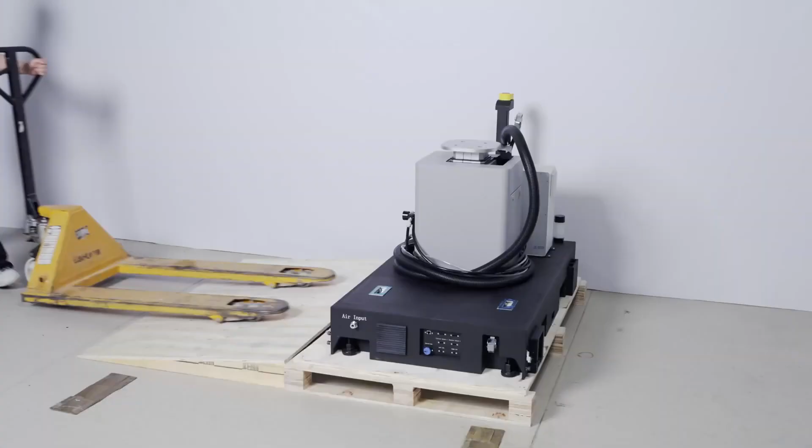DOBOT Palletizing solution. This video will introduce the installation tutorial for the palletizing solution. Open the wooden crate packaging. Use a forklift to position the workstation in the installation area. Note the distance between the front wheels of the forklift.

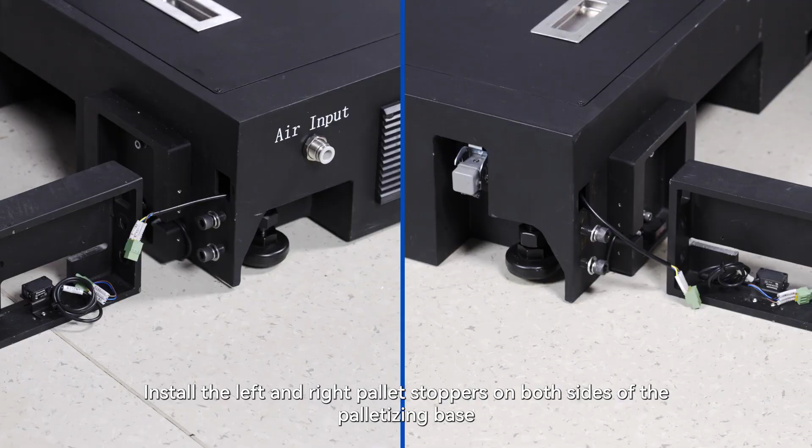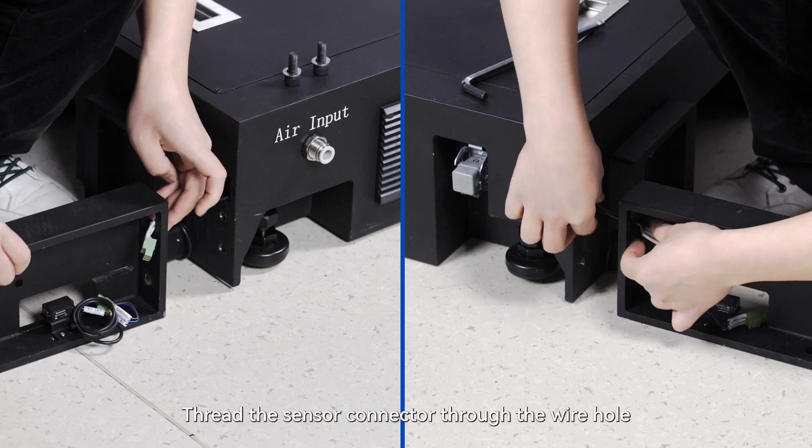Organize the items inside the package. Check all items. Install the left and right pallet stoppers on both sides of the palletizing base. Pay attention to the orientation of the grooves during installation. Thread the sensor connector through the wire hole. Tighten the screws of the pallet stoppers.

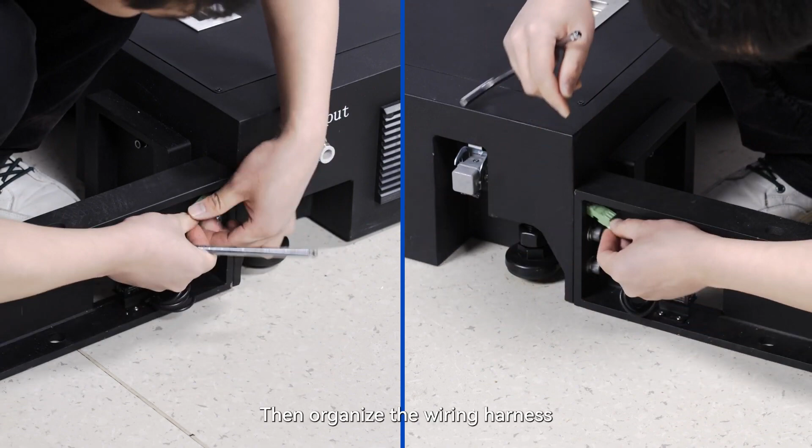Plug in the sensor connector. Then organize the wiring harness. Use a wrench to adjust the base cup of the workstation at the four corners. Level the workstation.

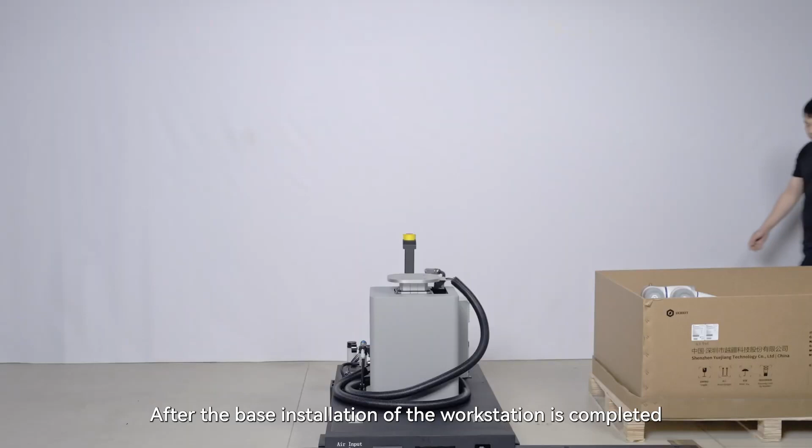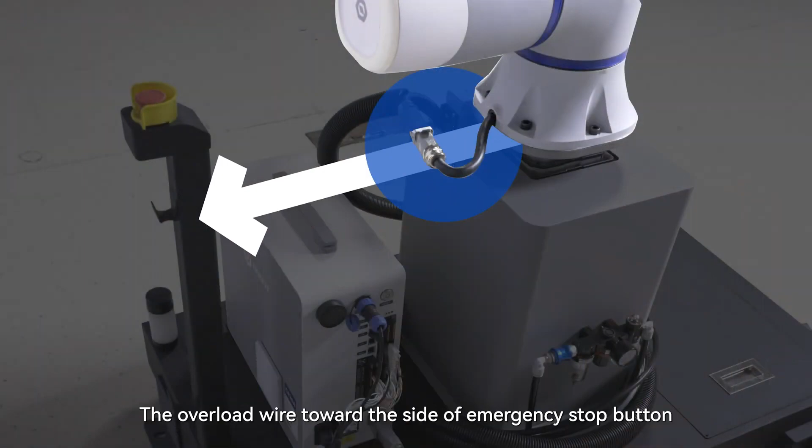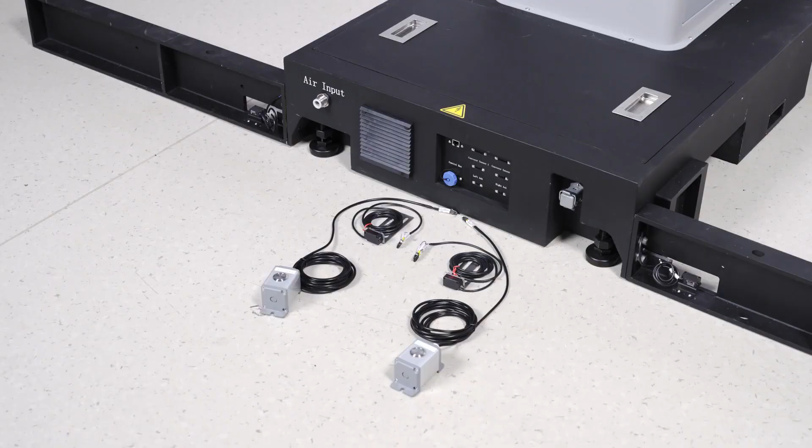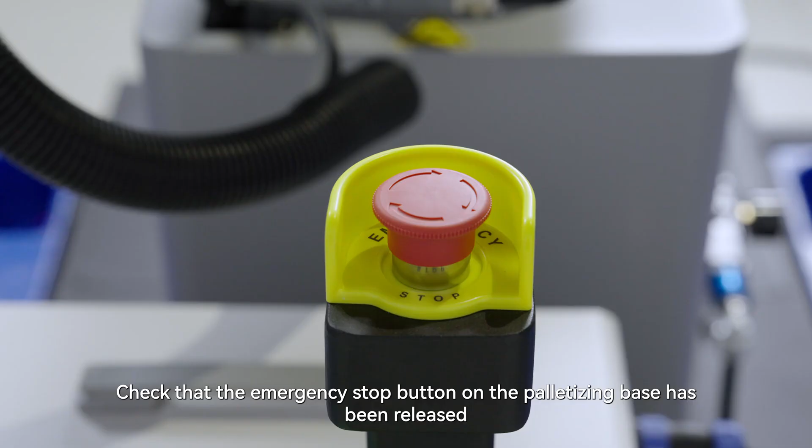Connect the pallet confirmation button box to the left and right ACK interfaces on the base respectively. Connect the conveyor photoelectric sensor. Check that the emergency stop button on the palletizing base has been released. Connect the power cord of the workstation.

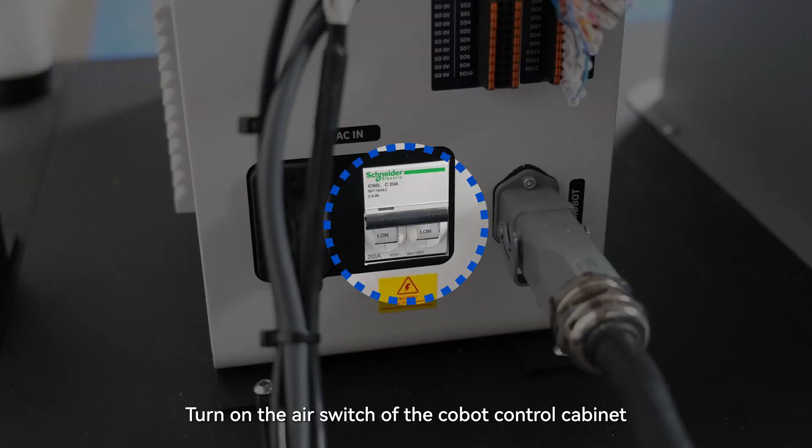Turn on the workstation leakage protection. Turn on the air switch of the Cobot control cabinet. Then press the power button. Wait for the indicator light to stay on steadily to complete the startup.

Visit the Dobot official website using a tablet or computer. Download the DOBOT Studio Pro software. After downloading, proceed with the installation. After the software is installed, connect the Cobot to your device via Wi-Fi or Ethernet cable.

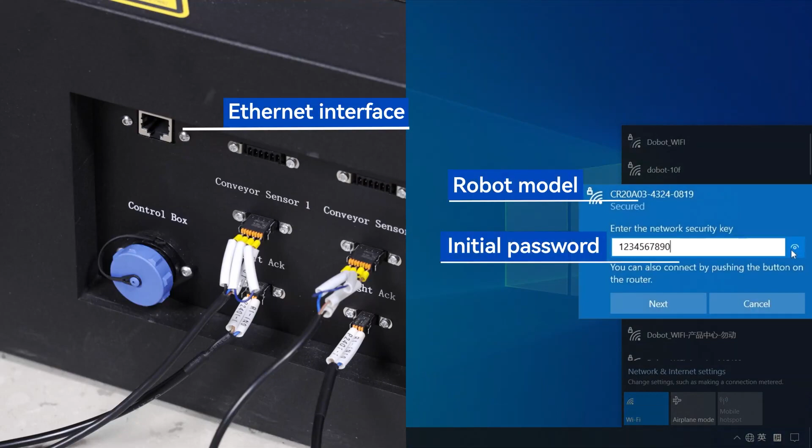Open DOBOT Studio Pro, select the Cobot you want to connect to. Check the software and controller versions. They should be maintained at 4.5.1.0 PAL or above. Set the enable button to on. Click the jog button in the top right corner to open the menu.

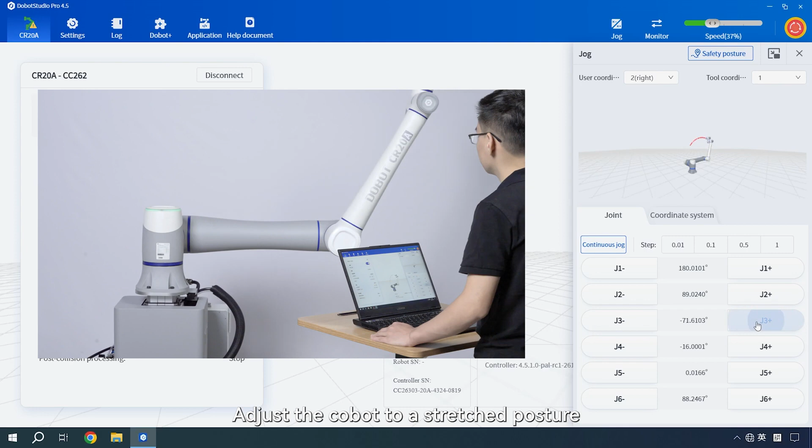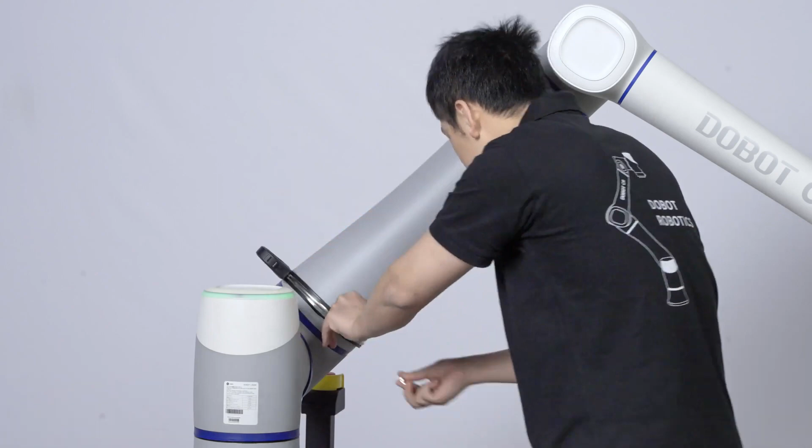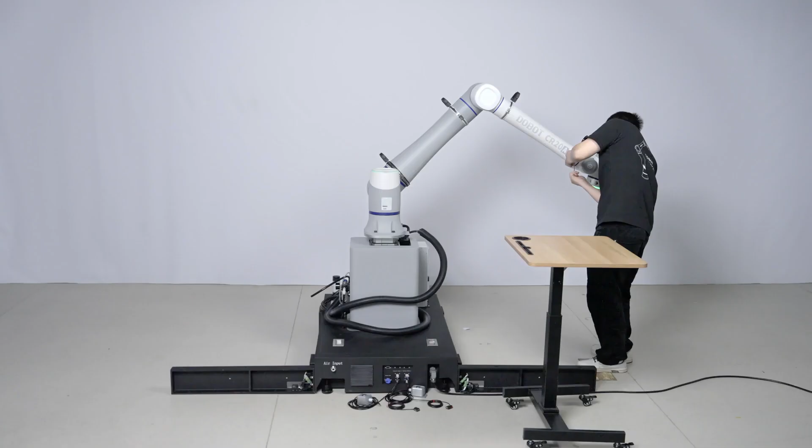Adjust the Cobot to a stretch posture to facilitate the subsequent installation of the cable harness and suction cup of the end effector. Install the 4 cable harness clamps onto the Cobot. Organize the cables and fasten them through the bracket.

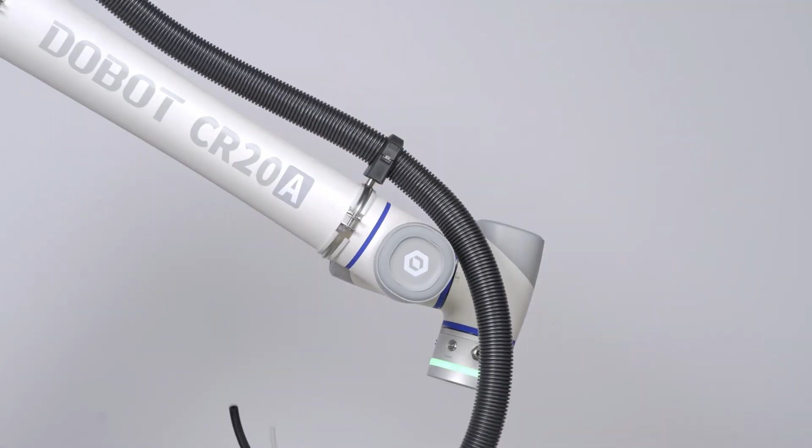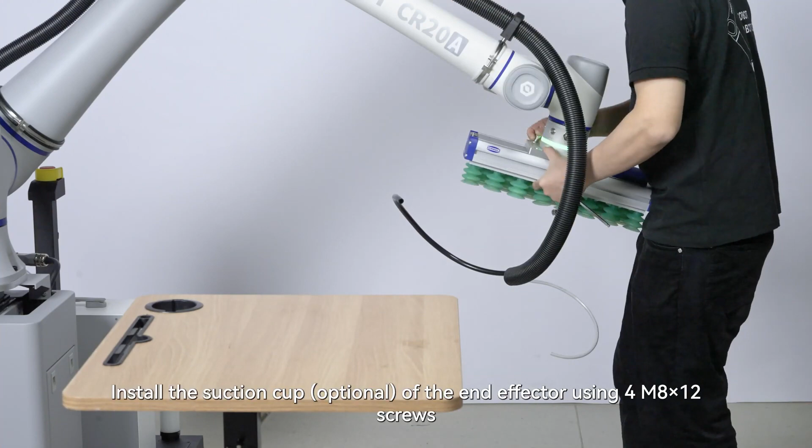Fix the flange to the end effector of the Cobot with 6 M12 screws. Install the suction cup of the end effector using 4 M8×12 screws. Adjust the lengths of the cables according to actual usage. Insert the 12 mm air intake tube and the 8 mm vacuum breaking tube.

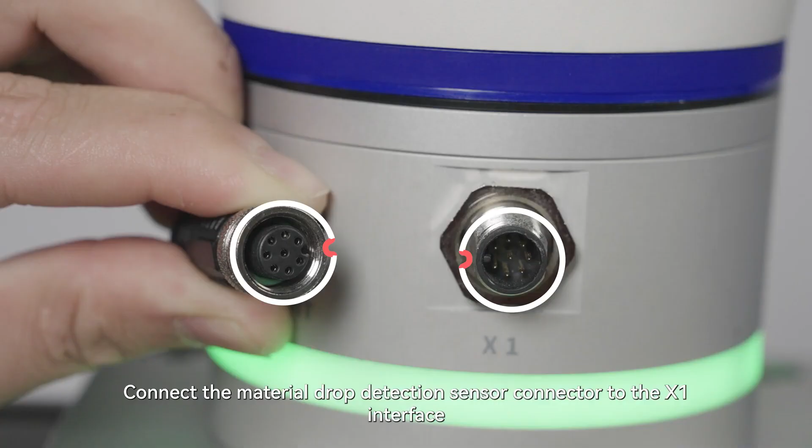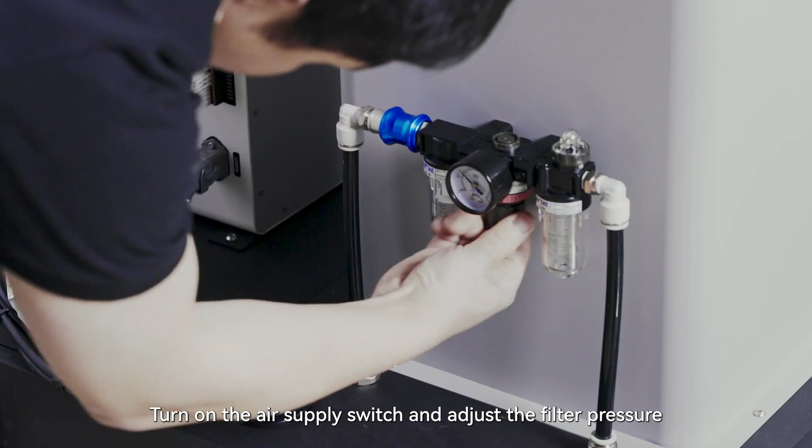Connect the material drop detection sensor connector to the X1 interface. Use a 12 mm tube to connect the air source to the workstation air inlet. Turn on the air supply switch and adjust the filter pressure. Recommended pressure is 0.6 to 0.7 MPa. After the palletizing hardware is installed and turned on, we can start working on the software.

Open DOBOT Studio Pro. Click Dobot+. Import the palletizing plugin provided by the distributor. Click on Plugin Installation to enter the authorization pop-up window. After copying the device serial number, visit the designated website for authorization. Enter the device serial number and the activation serial number provided by the distributor on the web page.

Click to obtain the registration code. Copy the registration code or save it as a file. Then reopen DOBOT Studio Pro. Paste the registration code or import the file in the plugin authorization window. Click Authorize. Wait for a moment. Authorization and plugin installation will be done automatically. After completing the authorization, you can start using the palletizing function to generate the running program.

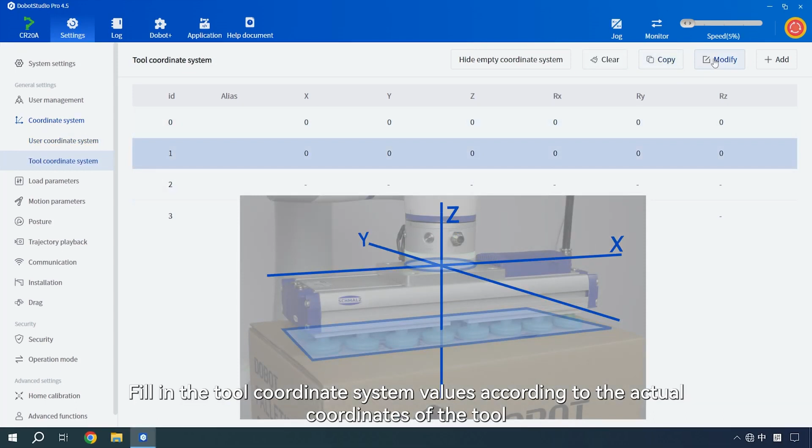Check whether the coordinate system used by the pallet has been built in the Settings Coordinate System Management menu. Click on Tool Coordinate System. Fill in the tool coordinate system values according to the actual coordinates of the tool. Click Save to complete the tool coordinate system setup. Click Monitor in the upper right corner of the interface. Check whether the default IO matches the actual setup.

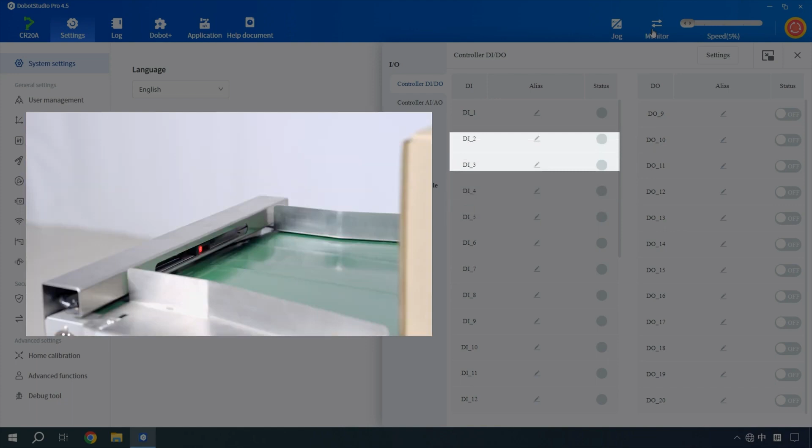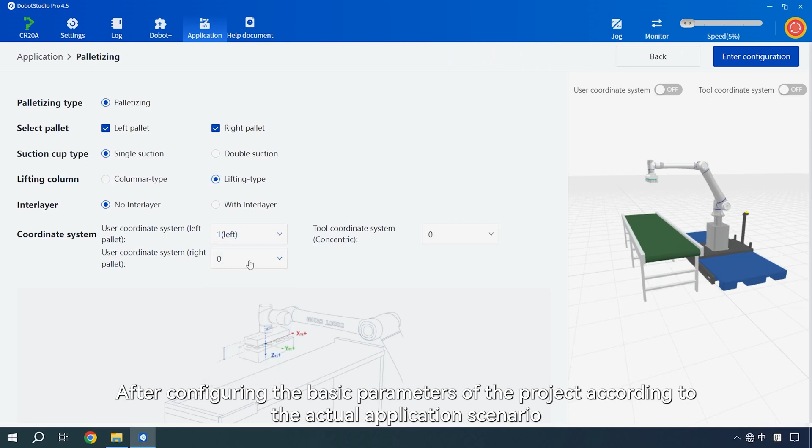Next, create a new palletizing project. Go to the Application menu, click Palletizing. Click New Project in the upper right corner to create it directly, or click to create a new project in More Projects. After configuring the basic parameters of the project according to the actual application scenario, click to enter the configuration. Configure the suction cup I/O signal.

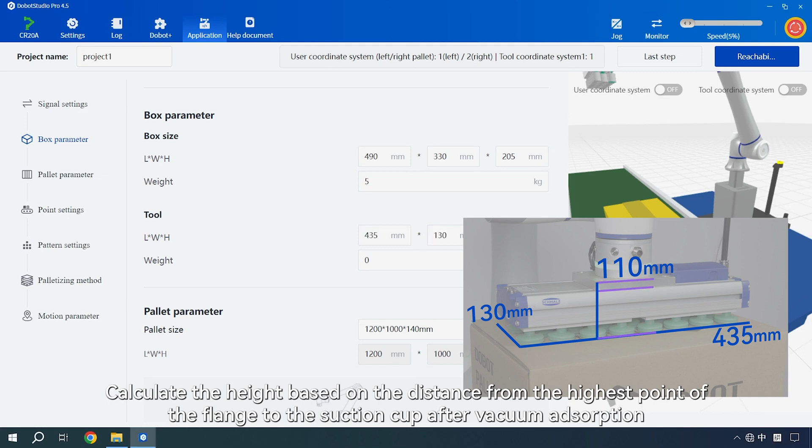Configure the signal for the conveyor belt to feed material. Configure the signal for confirming the new pallet's position. Next, set the length, width, height and weight parameters of the containers. Set the length, width, height and weight parameters of the end effector. Calculate the height based on the distance from the highest point of the flange to the suction cup after vacuum adsorption. Calculate the total weight of the flange and the suction cup.

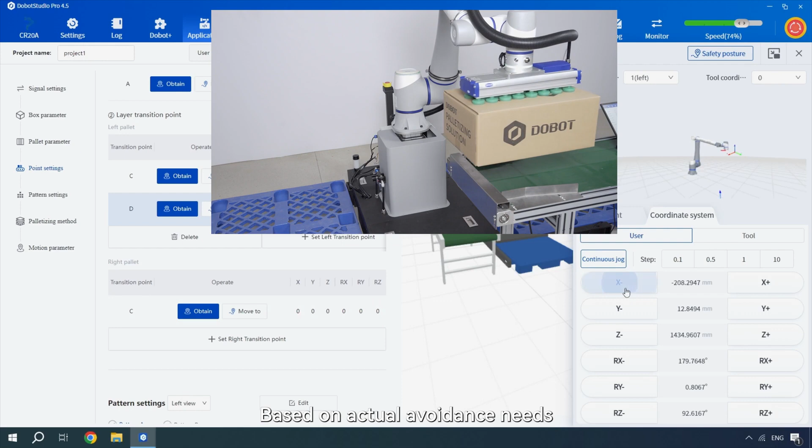Select the pallet size. Set the pickup points according to the actual collision avoidance needs. Configure transition points for the left pallet layers. Based on actual avoidance needs, configure transition points for the right pallet layers.

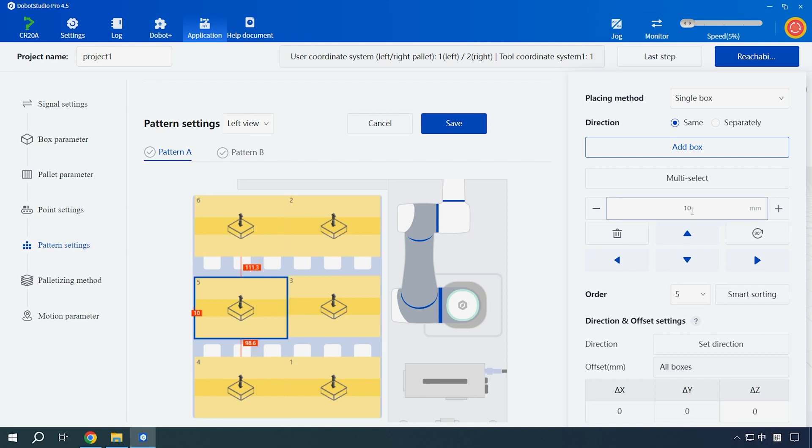Set the stacking pattern, set style A. Add containers. Adjust the container's unloading position. Set the placing order. Reasonably set the placing direction as needed. Adjust the placing offset as needed.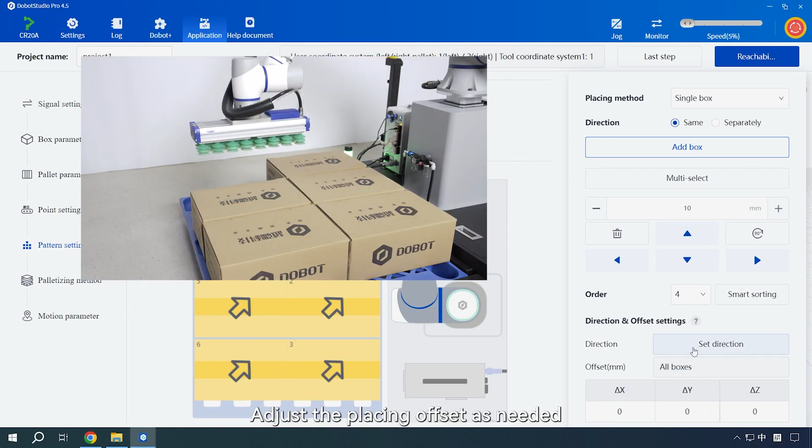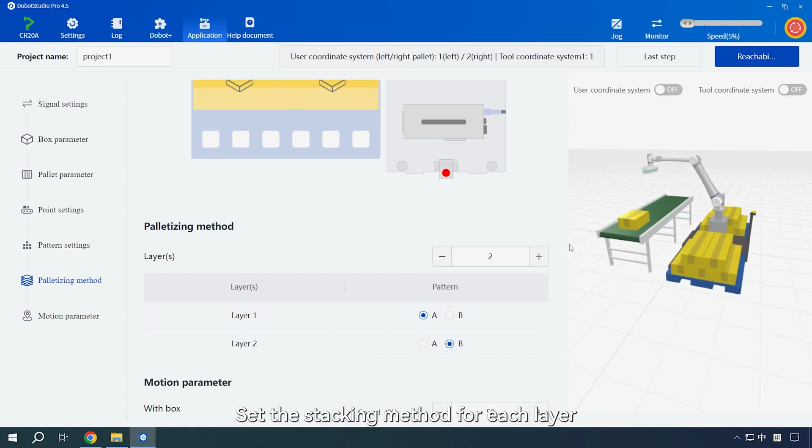If the stacking patterns of adjacent layers are different, set style B according to the stacking requirements. Set the number of layers after completing the stacking pattern settings. Set the stacking method for each layer. Motion parameters can be set according to actual needs. Default settings are recommended. Perform reachability testing after setting. Once the testing passes, click Save.

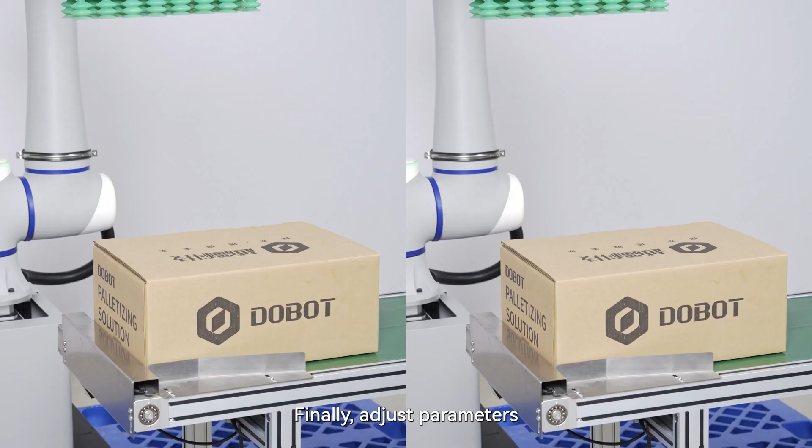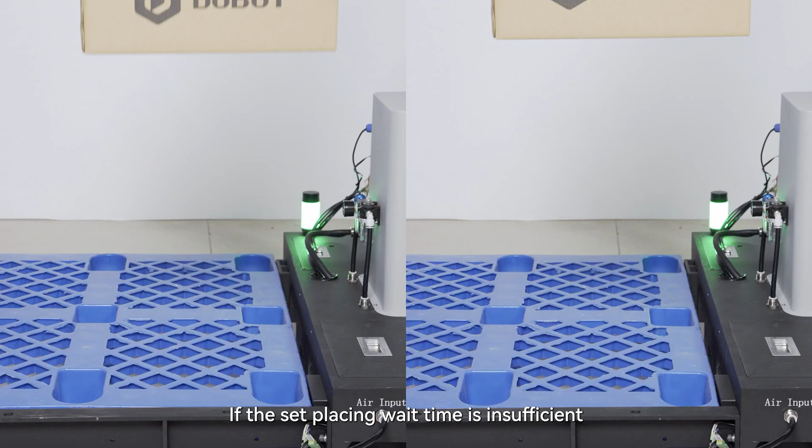Finally, adjust parameters. If the set suction waiting time is insufficient, it may lead to material dropping issues. If the set placing wait time is insufficient, it may lead to inaccurate placing positions. If the safe height for picking up materials is not sufficient, there may be instances of squeezing the material box. Enable vacuum detection. When the bin falls, the robot will stop running and issue a warning.

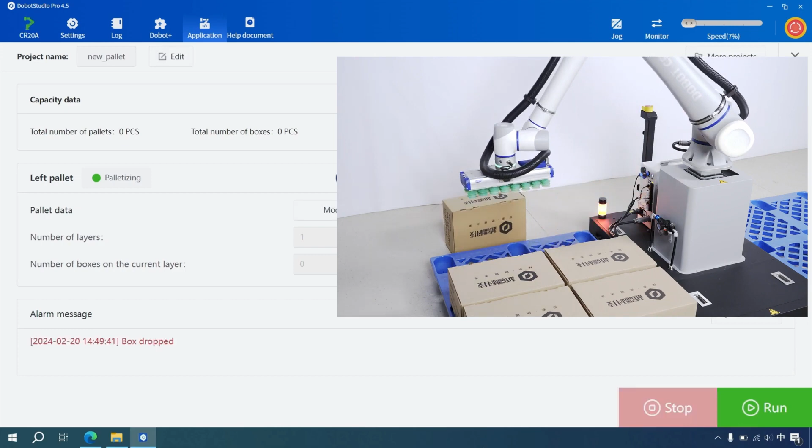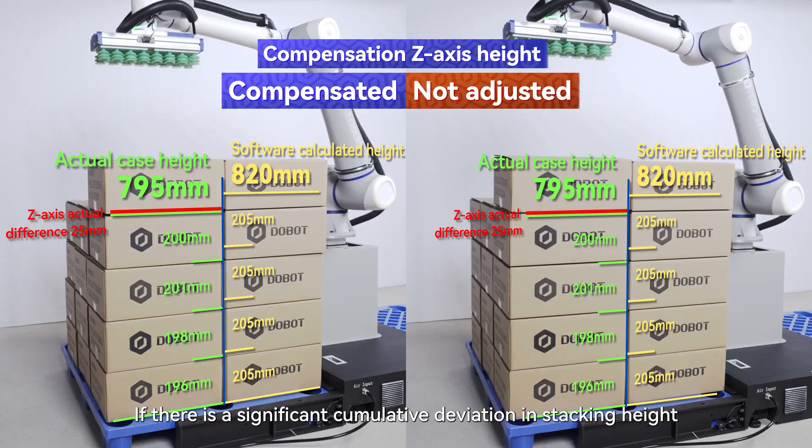After setting the palletizing height compensation, when palletizing multiple layers of material boxes, if there is a significant cumulative deviation in stacking height, adjust it using the Z-axis height compensation function. At this point, the palletizing program has been successfully configured. You can return to the home page to start running the program and view the palletizing program execution data.